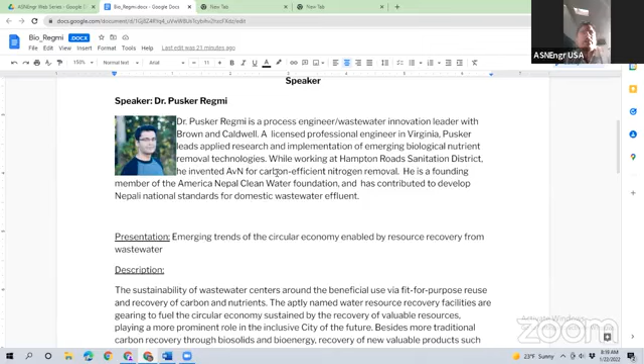So today's title of the presentation is Emerging Trends of the Circular Economy enabled by Resource Recovery from Wastewater. With that, I welcome Dr. Pusker and hand over to him my screen. Dr. Pusker, please start your presentation. Thank you.

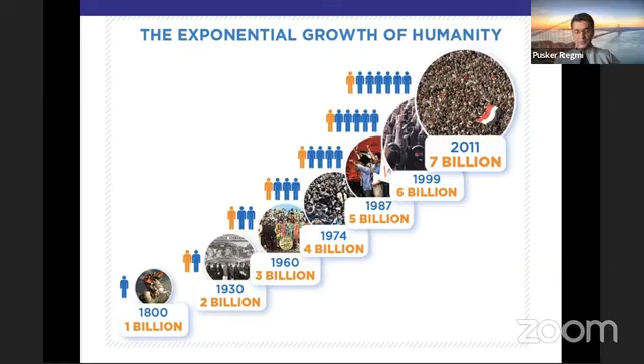Because when you put so many people in one location, and the classic example is Kathmandu. Kathmandu's population has grown by an order of magnitude in the last 20, 30 years. And if you put that many people in a small location, you generate a lot of wastewater. And if you do not treat it and do not do any beneficial things with it, it becomes an environmental disaster. So population growth, especially in urban areas, is a huge issue when it comes to wastewater.

So the current model of how we look at resources, not just wastewater, but in general any resources, is we get engaged in this extraction kind of a mentality. So we extract resources, we produce stuff with it, we distribute, we consume, and eventually we waste. And it ends up in our water bodies, it ends up in our landfills, and we get nothing out of it. This is a waste model, and this is a very linear type of a model, and it is highly unsustainable.

And now there is a growing kind of, and you can see this in other emerging fields as well, like battery technologies, electric cars have become a new wave of sustainable practices now. And there is this idea of, can we recover what we use so that we don't have to engage in exploitive extraction activities like lithium mining and so forth, right?

So in a circular economy, or a circular-centric way of looking at things, what you do is you extract resources, limited resources, you produce, you distribute, you consume, and then you reuse as much as possible, you repair and recycle. And when you do this, you close the loop. There is no waste or a minimum amount of waste. And that is the target even in the wastewater sector.

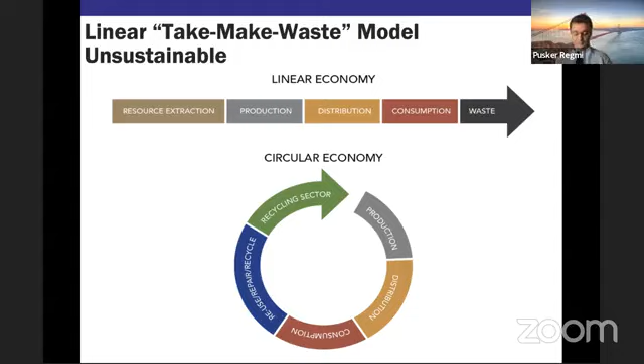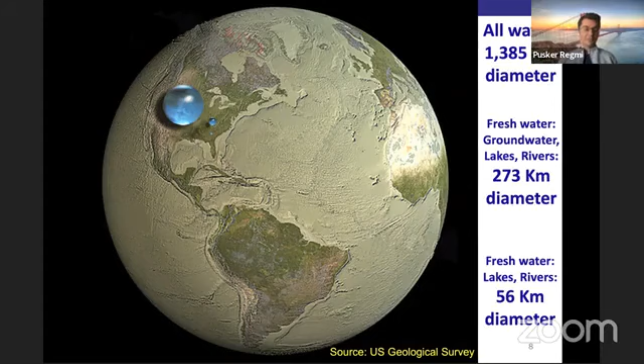So only 3% of the total waters is fresh water, and within that 3% fresh water, 2/3 of that is frozen in glaciers. So we are talking about just 1/3 of fresh water that is available for human consumption. And this is what drives the 7 billion people of the world, right? So we must get engaged in using these resources as efficiently as possible.

So the sustainability aspect of water is a huge deal, water and wastewater. This is even recognized by the United Nations. If you look at Sustainable Development Goal 6, it calls for clean water and sanitation for all. So there is a big recognition that if we do not take care of our water, and if we do not take care of sanitation, the world cannot move forward.

We cannot develop. So, in thinking of that, the only way to provide clean water and sanitation is through sustainable practices. And this will involve reuse, this will involve engaging in infrastructure that is low cost and available for everybody, especially in developing countries.

So that brings me to the main core of the talk today, which is wastewater is a resource. And we say it's a resource, but what are the resources in it? The first one is obviously water itself. Wastewater has water, right? It's mostly water. And that water is that same small percentage of water that is available in the world. And the fresh water is limited.

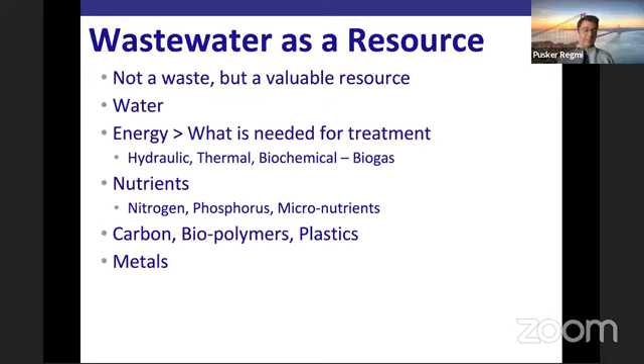And the third thing is the carbon. The carbon that can be used for energy can also be used to produce things like biopolymers, bioplastics, which are much more sustainable and can result in new waves of products which are environmentally friendly. And the last thing, in trace amounts, there are also metals, and these metals can also be recycled and have some beneficial use. In some cases, there is even gold that you can recover from wastewater, and gold, we know, is a timeless kind of metal. It can have several uses besides economic uses.

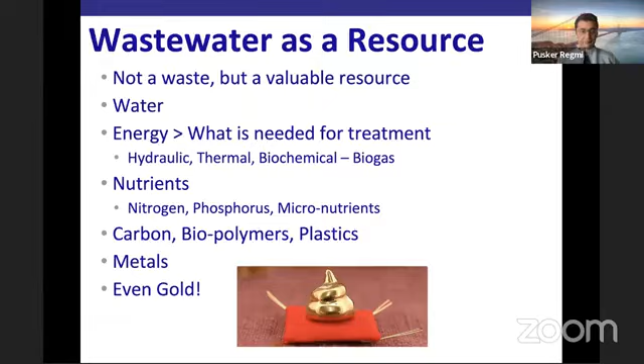So let's talk about water. What do we mean by water recovery from wastewater? This concept of fit for purpose is highly applicable when we look at water. Water has a different quality depending on where it is in the life cycle. So this is a representation of how the water quality changes throughout the water cycle, the way that we use it. We take raw water, and the raw water is, I would say, medium quality. For drinking purposes, we have to upgrade its quality. We engage in water treatment, where we improve the quality of water and make it safe for human consumption.

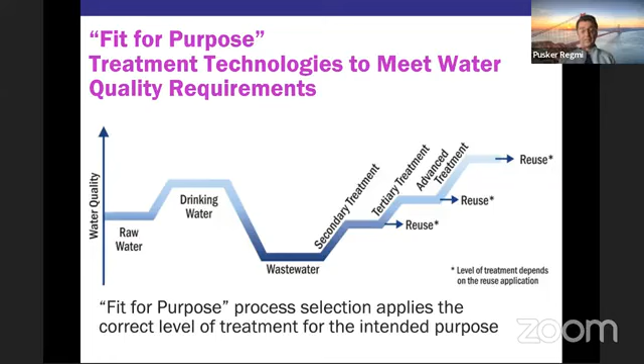So if you want to increase the water quality again, you need to engage in treatment, and there are several treatments, and this is the area that I work in mostly. We engage in secondary treatment, tertiary treatment, advanced treatment, depending on what type of use we want to have with this wastewater effluent, right? But even with secondary treatment and some level of tertiary treatment, the water can be used for different purposes. Not drinking water, but you can use it for irrigation. You can have different uses. So this idea of treatment based on what purpose it's going to serve is a very important concept in the water sector. It drives how much investment you have to make to improve the water quality and so forth.

So when talking about this idea of reusing water, what you can see here is we've been doing this all the time; whether we want it or not, this happens all the time. If you think about rivers of the world, they pass through a lot of cities; where there is a river, there is a city mostly, right? If you think about the Ganga in India, or the Danube in Europe, or here the Mississippi, there are several cities built around waterways and rivers, right? So what happens is you take water from the river, upgrade its quality and make it drinking water, and the city and its population are going to use it.

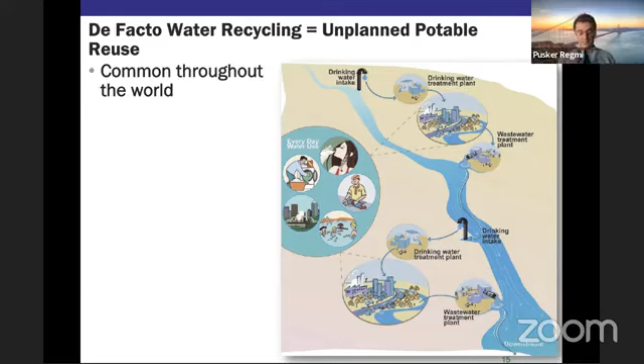And then you generate wastewater. In developed countries, you treat it, and then you send it back to the river. And the same river flows to the downstream city, and the downstream city uses the water from the river again. The cycle continues. So this is a kind of an informal way of reusing water, and this happens all the time. So what we are trying to do in the industry right now is do some of this more intentionally and with more control.

So that brings me to the idea of direct potable reuse. The one that I showed you is more like indirect potable reuse, but you can do this directly as well. The way that is done is the urban environment uses water, wastewater is produced, and then the wastewater is treated in these conventional treatment plants. But after the conventional treatment plants, to increase its water quality, you do advanced water treatment. Here, advanced technologies like reverse osmosis and UV disinfection are used so that it's 100% safe for human consumption.

And if you want to do direct reuse, then you don't put it back to environmental buffers. You directly send it to a water treatment plant to get into the drinking water supply, or you directly send a water line to the urban water distribution system. So by doing this, you are closing the loop on water. You used it, you treated it, you increased the quality, and then you again consumed it. So this is a circular kind of consumption. There is no waste in this model.

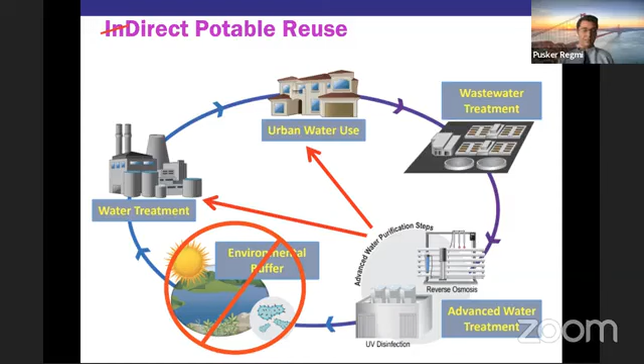And this is, unfortunately or fortunately, going to be the future for a lot of water-stressed cities in the world. Think about the western part of the United States, California, and so forth, where increasingly fresh water is getting stressed. And the question that you may all have is, is this potable reuse safe? Can this be done safely? Is there any danger for human life? And does it cause long-term side effects and so forth?

Fortunately, on that, we have good news. This practice of direct potable reuse has been done for more than 50 years now. We have a classic example from Windhoek, Namibia. They have been doing potable reuse since 1968. It's not a village. We're talking about a small city, and the results are clear. There is no adverse human health impact because of direct potable reuse. And this is good news. This is what's going to be instrumental in solving some of the water crisis that is impending due to climate change and other stress factors.

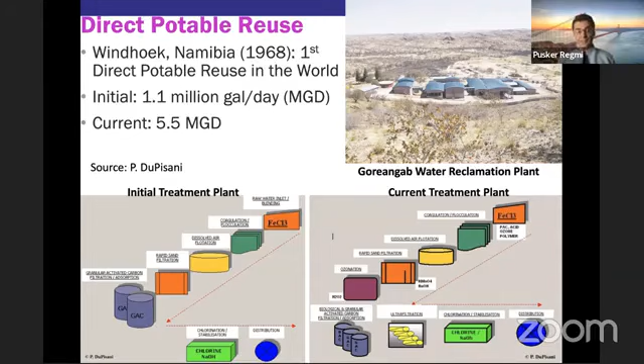And when we talk about water reuse, sometimes we are not exposed to these ideas, right? But you may be surprised that water reuse or recycling could be happening near you. I live in Maryland, close to Washington, D.C., and in the Northern Virginia area, we've been doing this since 1978. This is not direct potable reuse, but this is the environmental buffer concept, where the wastewater treatment plant is discharging its effluent into Occoquan Reservoir, which is a man-made lake reservoir for water treatment and distribution. And the water treatment plant is taking its source water from the same reservoir. So this has been going on for a long time.

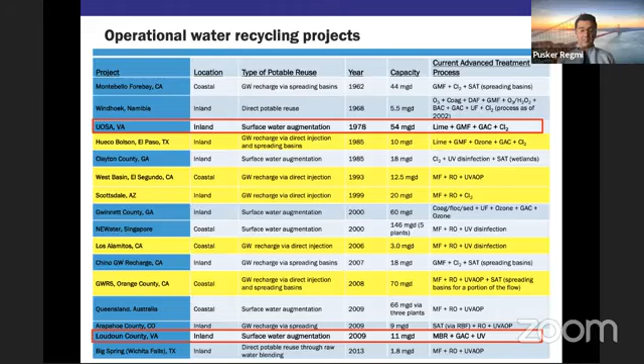And there are also other examples of it. Loudoun County is another one where surface water augmentation, the same concept, is used. And then there are places like Big Spring in Texas, where direct potable reuse, exactly the same concept as the Windhoek, Namibia example, has been happening since 2013. So this is closer to home now. This is not an alien concept. This is not something to be scared of. This is everywhere. It's safe. It's proven, and it's just a matter of people accepting it. And it will increasingly become more of a solution as we move forward.

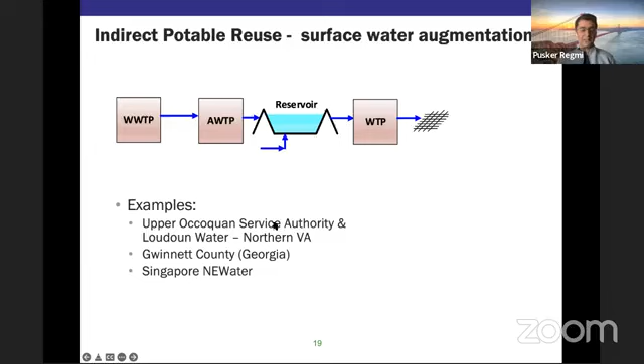So here's the example of indirect potable reuse. You have a wastewater treatment plant. The effluent gets treated in advanced water treatment plant type of infrastructure, improving the water quality. At this stage, it's almost ready for potable reuse. The quality is the same as what you would produce for potable reuse, but if you don't have to go to potable reuse, the idea would be to send it to the reservoir, and then with the environmental buffer, you go to water treatment, right? This is what is being practiced in some locations. The Northern Virginia example, Gwinnett County, which is one of the most prominent counties in the Atlanta area, also practices this. And Singapore, being an island nation with limited water resources, also engages in this type of activity.

And eventually, when the population centers are ready to use that, they can take it out from the groundwater reserves or aquifers, right? And this is a huge initiative in the Los Angeles area, Orange County area. They've been already doing this with a lot of success, and this is what they are counting on to combat some of the water stresses of the future.

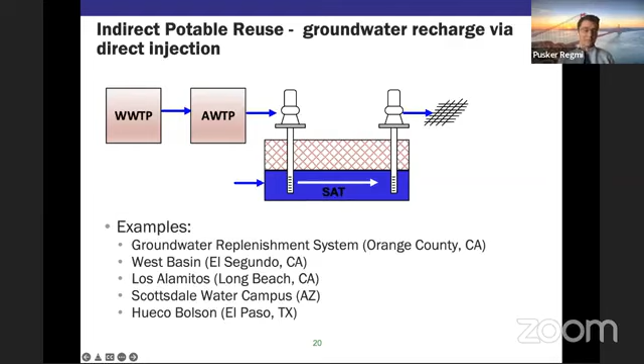So the other aspect that I want to talk about a little bit is the Eastern Virginia example, and this is the Hampton Roads area, and there is a utility called Hampton Roads Sanitation District. I spent 3 to 4 years in this utility, working as a PhD student doing research. So I'm pretty familiar with the area because I lived there, and I saw firsthand some of the consequences of climate change and what happens when we have water levels in the groundwater that go down, and so forth.

So the model of treatment, again, already talked about how it gets treated. Here, a lot of drinking water and useful water comes from groundwater. So we tap into the aquifer, the water reserves below the ground. We use it, and the utility, in this case Hampton Roads Sanitation District, has 13, 14 wastewater treatment plants throughout the area. They treat the wastewater, and in most cases, they discharge it to the ocean.

And this is not the most beneficial use of treating the water, because what you are doing is you're sending decent quality water into the ocean, as opposed to sending it back to the aquifer. You're not closing the loop. You are making it go to the ocean. And the other downside of doing that is not only you are sending medium quality water to the ocean, but also you're sending some of the nutrients to the ocean.

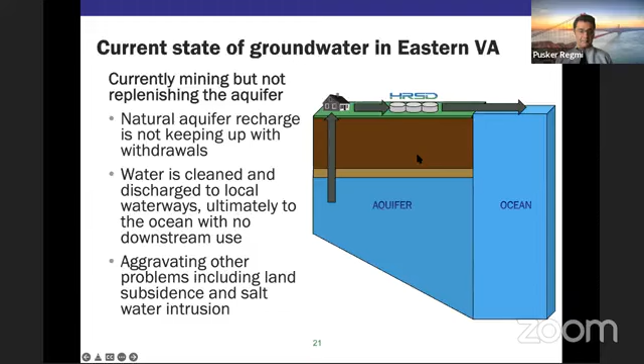And so if you look at the issues that I was just mentioning, the drawing of the groundwater: in this part of Virginia, they have 177 permitted groundwater wells, and 200,000 unpermitted wells that are used for domestic use. And this is a huge amount of water that people are drawing for beneficial use every day. And if we look at the groundwater levels, they are dropping in this part of Virginia, the Hampton Roads area. In the last 100 years or so, it has gone down by 50 meters. This is a huge number, right?

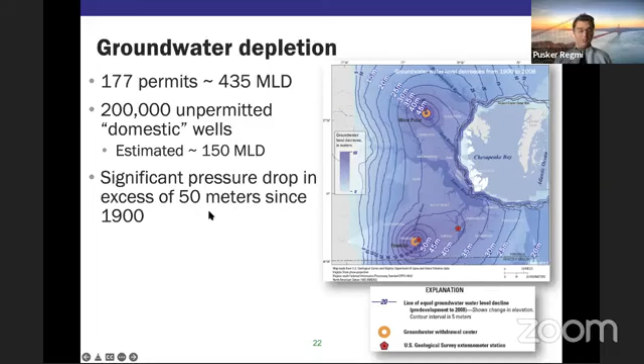And the consequence of lowering the groundwater is severe. So if you think about the Hampton Roads area, it's the number one at risk besides New Orleans in terms of sea level rise. About 50% of the sea level rise, it seems, is caused by land subsidence. And land subsidence is nothing but groundwater levels going down, and there is this compaction of land happening, which causes your land to go down. So when the land around you goes down and the sea is rising because of melting ice and whatnot, what's going to happen? You'll have a compounding effect of sea level rise.

And I lived in Norfolk for many years, and I saw this firsthand. Even if there was a 2-hour rain, the city used to get flooded. All the storm water used to start overflowing, and it was already really bad. And this will continue to get worse if we don't do anything about it.

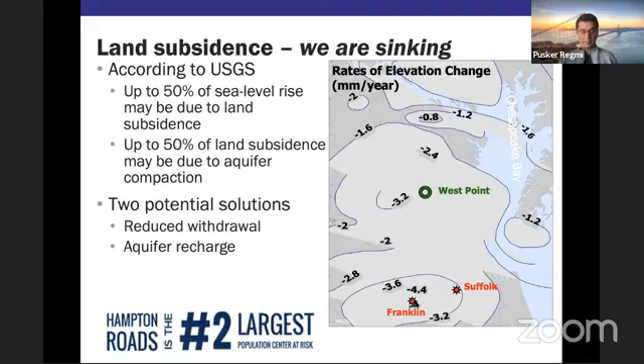And so with that kind of a backdrop, what Hampton Roads Sanitation District decided is to close this loop. So as opposed to sending the effluent from the wastewater treatment to the ocean, now what they are going to do, and this is already the work that is happening, they are in the process of building these advanced water treatment plants.

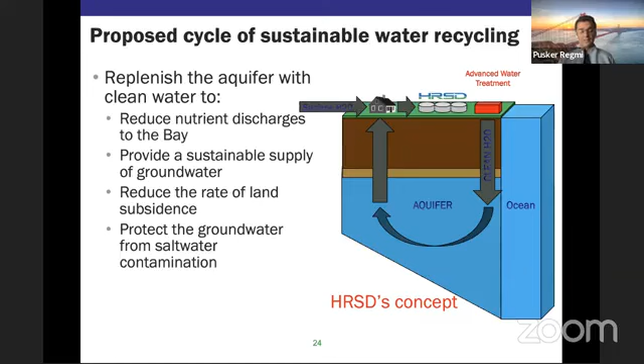And the idea is to clean the effluent of wastewater, make it better, send it to the aquifer, increase the groundwater levels, and close the cycle. So this is the concept that is already happening around us. And this seems like the way forward for all the places where this type of issues are happening. So this model is highly recognized as being very sustainable, and a lot of people are behind this concept.

And just to give you a landscape of the advanced water treatment that I was talking about. So you take the wastewater and then you engage in improving the water quality of it. And there are already proven, highly proven technologies to do this. There is no question in that. The water quality coming out of this is of highest quality. There are no pathogens. There is nothing in it that jeopardizes human health.

Reverse osmosis is one of them, nanofiltration, and even the combination of granular activated carbon and granular biologically active carbon. Both of them, when they are combined, can produce high quality water that is safe for human consumption. So we know how to do this.

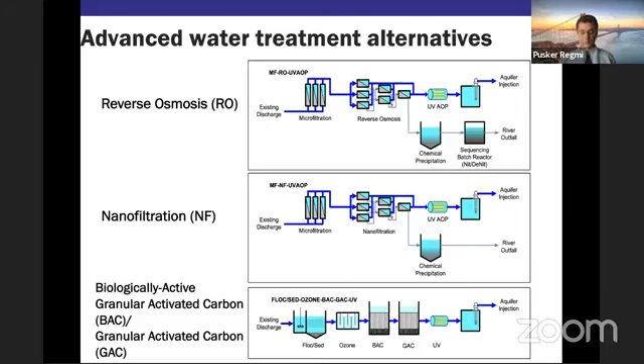So we talked about water and why water is important in many different ways, right? For human consumption, through to flooding in the low-lying cities, all of that. So water is important, but nutrient is also very important. So the nutrient story, I think, starts from our ability to create synthetic nitrogen. This probably is one of the biggest, one of the most underrated inventions of the last century in my mind. Because without this, I don't think we could have been 8 billion people right now. We'd be limited by nitrogen.

So nitrogen that is fixed in the natural environment is a small portion of what we use to fertilize our crops and get food out of it, right? So this chemical, physical type of process can take nitrogen from the atmosphere. And we all know that most of the atmosphere is nitrogen, almost 79% of it. And we can convert that into ammonia. Ammonia is what gives plant life the fuel to grow, right? So this was done, I think, in the 1920s, and this rapidly changed the human course, and it's one of the biggest inventions I can think of.

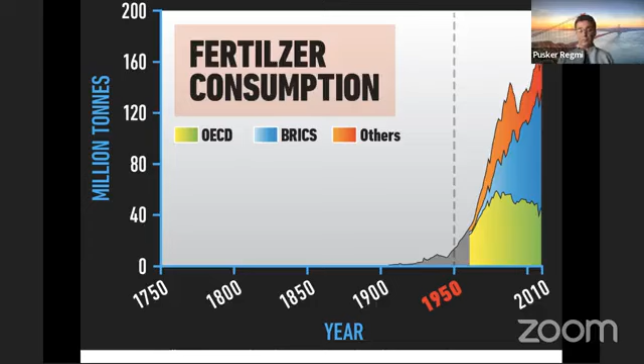But the issue is, this process was so efficient and so economical in general, we stopped hearing about fertilizers that much. It was cheap; even if you have some memories back from Nepal, urea and so forth, it's relatively affordable. So the use of it exponentially grew. With it, food production also grew, but we were indiscriminate in its use. We overused it in some cases. So the fertilizer consumption went up. Societies started to grow. The food shortages or limitations on food growth in at least slightly more developed countries almost altogether vanished, and as a society we were progressing.

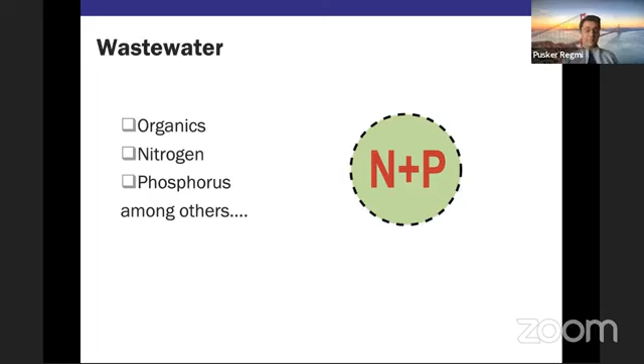And so that brings me to another nutrient along with nitrogen, which is phosphorus. And wastewater has plenty of nitrogen and phosphorus. Both of them are important. And I think phosphorus can be even more important. So the idea of improving water quality and doing wastewater treatment in developed countries is nothing new. We've been doing this for more than 100 years. And there are a lot of sophisticated processes based on biology and natural systems that can be used to treat wastewater, right? And this has been refined over time, and these are well established, I would say.

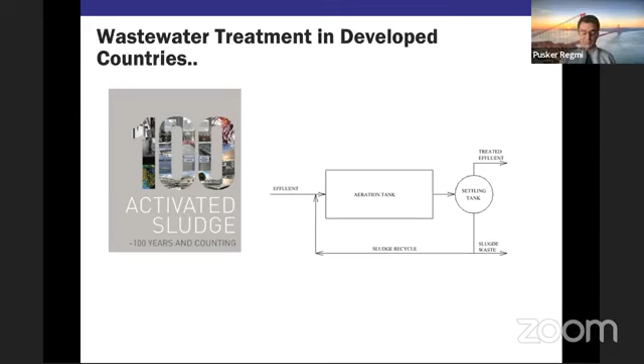And the field that I work on, I'll just introduce a little bit of what I do also, is advanced nutrient removal. I mentioned that we use biology and natural systems to treat our wastewaters, especially removing nitrogen, because we know if not treated, nitrogen can end up in your water bodies and cause all sorts of nuisance, right? So nutrient removal is extremely important from wastewater.

And for the longest time, we've been using processes and concepts that are more energy and resource intensive. And my day-to-day job is to make this more sustainable. How can we remove and recover nutrients from wastewater so that we can do something beneficial with it? At the same time, how can we limit nutrients to a very low level in the wastewater effluents?

And this is highly relevant in the area that I live, which is the Washington, DC metro area. Here, all the treatment plants, DC Water and WSSC on the Maryland side, engage in something called enhanced nutrient removal. So their mandate is to take out as much nutrient as possible. And this is done to save Chesapeake Bay, basically. Chesapeake Bay is a national treasure. Obama claimed that, I think. It provides a lot of economic benefits for this area, and we must do this.

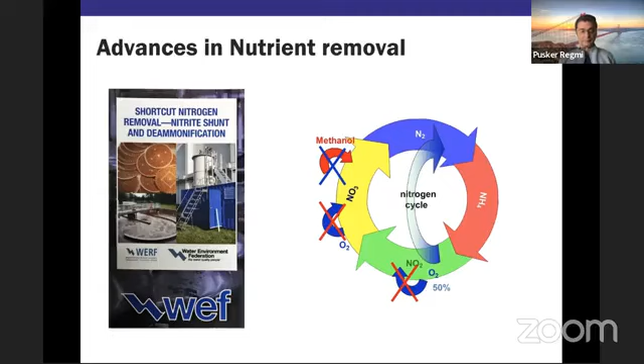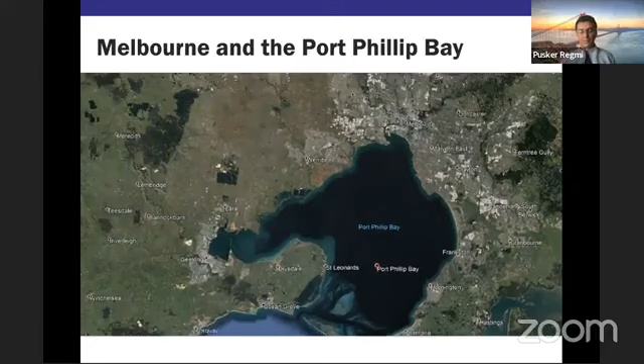So that brings me to one of the projects that I fondly worked on in Melbourne, Australia. Melbourne is a bustling, growing city of around 4 million people in the metro area, I think. And it has this bay called Port Phillip Bay. So Chesapeake Bay is quite important for the Washington, DC area, and Port Phillip Bay is similarly very important to Victoria and Melbourne City itself.

And with this growing population in Melbourne, they were facing similar issues. The bay was getting enriched with nutrients. The quality of water was going down. The fish life started to suffer, and the trend continues. It seems like it will be a big environmental issue in the future.

So this picture on the screen shows you some of the natural, almost hybrid natural and human-made systems that they use to treat wastewater. And to be honest, they do a pretty good job. They use these so-called anaerobic lagoons for treating the wastewater. And when they use this anaerobic process, they end up producing biogas. The biogas, we all know, can be converted to electricity, and that electricity powers some of the more advanced wastewater systems they have in the process.

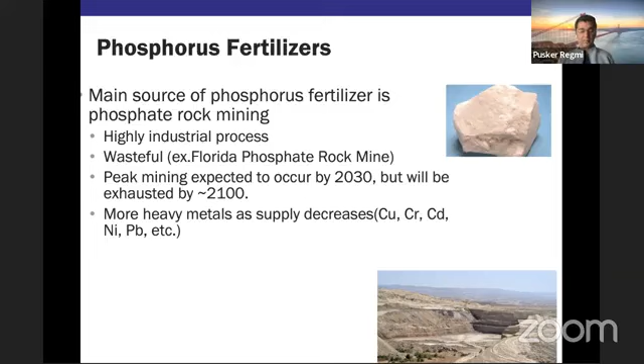And some of the wastewater recovery concepts can help with this, right? So this is a very exciting field that is emerging in our industry right now. And I feel like this will change a lot of things. So peak phosphorus is a concept similar to peak oil, right? There is no man-made alternative to phosphorus. So everything that we use needs to come from nature, and it's limited. So we have to start looking at concepts of recycling and not wasting any of it, right?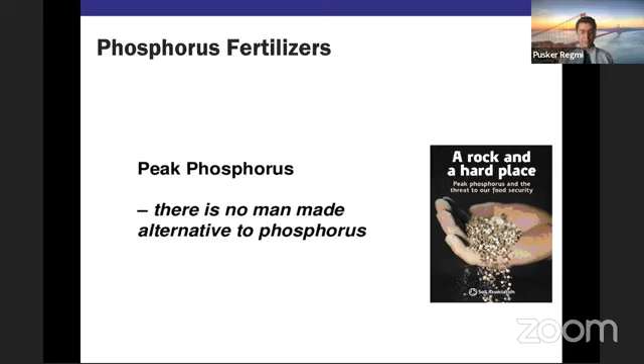So look at what happens to food security if the supply chain of phosphorus gets stressed. If you think about the mining activity and so forth, over time it's going to get more expensive, because the process that is needed to get phosphorus from mines is going to be more energy intensive. It's going to be more intensive, and so the cost is going to go up, right?

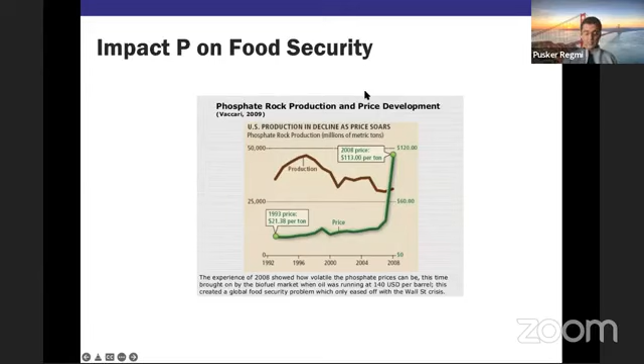Whereas the production, based on the location of phosphorus and the quality, is going to go down, right? So this is supply and demand, and the increasing price of phosphorus will have a huge impact on the overall food production of the world, right? So we need to take care of this. And the other sad situation, if we look at phosphorus, is where it's located.

Where are these mines? If you look at the biggest concentration of phosphorus, it's in Western Sahara, the Sahara Desert, and Morocco. 75% of it is in that region. And in the United States, it's only 2%. There's some in China, Russia, but in general, these are not the most stable parts of the world, right? So to rely on phosphorus mines in Morocco or Western Sahara is not ideal

for any of these nations, right? There could be political issues, geopolitics. Any number of these issues can disrupt the whole food production throughout the world. So because of this as well, we must engage in sustainable practices.

So again, the idea is to produce wastewater. The wastewater gets treated, nutrients get recycled. It's used for agriculture. Food is produced, humans consume it, and we close the loop. And this is the dream, right? And it's not only a dream, I would say. We know how to do this.

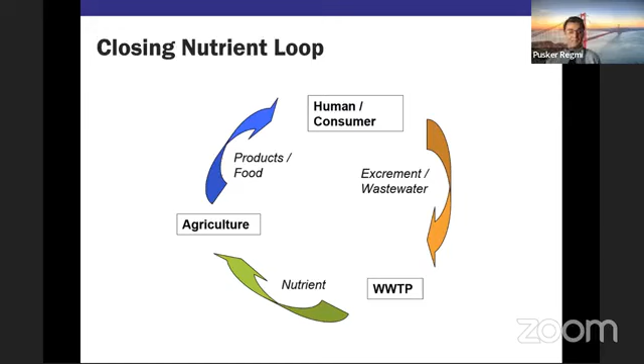There are a lot of steps to be taken and a lot of education when it comes to people understanding these concepts, politicians also getting behind these ideas, and as a society, just demanding that, hey, we need to do more and we need to be more sustainable. We know how to do these. These are highly beneficial ways of creating cities and developing our society in general, right? So we must engage in these activities, and we know how to do it.

So with this phosphorus recovery concept, as I mentioned, we already know how to do it, and it's actually getting better. The industrial processes, like the one I'm showing here, is just one of the many examples of this type of technology. It can recover struvite, which is a phosphate mineral, but at the same time, it captures some of the ammonia.

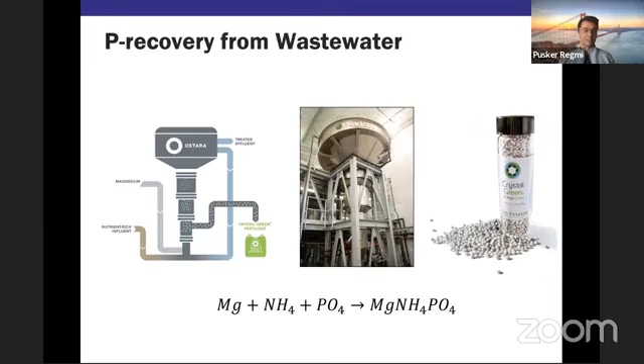So these crystals, really good looking fertilizers, nice pellets, can be used as a slow release fertilizer in your lawn. It can be used in agriculture. And this is a highly sustainable practice that we can do already. So phosphorus recovery ideas are gaining traction, and it seems like nothing is going to stop it, right? And I'm glad to see a lot of utilities and cities getting interested in these in general. This same technology was demonstrated in the world's largest wastewater treatment plant in Chicago.

And again, highly established kind of a concept. We know how to do this, but getting the recognition or demonstration in the world's largest wastewater treatment plant just gives us even more credibility. So yeah, all these things are pointing towards a highly sustainable future for us, and I'm quite excited about it.

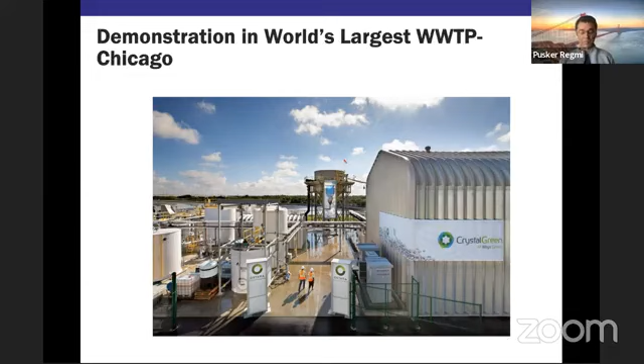So then we move to the carbon side of things. I talked about water, I talked about nutrients, and now let's talk about carbon, right? And carbon, again, you can think of carbon as energy to a certain extent. Carbon can be converted to energy, right? But carbon can also be converted to a lot of other things. This slide shows you how carbon can be captured from wastewater.

Even the process of simply doing wastewater treatment is going to produce biosolids. Biosolids can be digested to produce methane, and methane can be used to produce electricity. You can produce volatile fatty acids if you do some sort of anaerobic treatment. You can completely burn or incinerate that sludge, biosolids, to produce heat. So there are so many ways to use the carbon that is captured in the wastewater.

But unfortunately, for the longest time, the best use that we could do was landfill the biosolids from wastewater treatment. So you create biosolids, you do not do anything beneficial with it, and then you landfill it. And the problem with landfilling of biosolids is it does not have any beneficial use, but it is an environmental disaster, because slowly that biosolids is going to release methane, and methane is a greenhouse gas, right? So we are not getting anything beneficial out of it, but we are polluting our environment with it. So that was the sad state of affairs for the longest time.

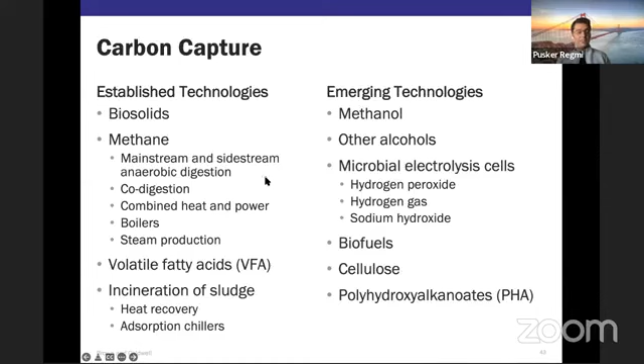But now there is a growing recognition that, hey, we cannot do that. These biosolids, or these types of precursors to materials, are highly beneficial. We should be doing something more meaningful and useful with them, right? So the ideas of biofuels, microbial electrolysis cells, cellulose, PHA, which can be precursors to bioplastics, all of these things are gaining traction because of that. We can't simply landfill waste from wastewater treatment. We should be doing something better with it, right?

So one of the easiest, or well understood, things people did for a long time is biosolids treatment with anaerobic digestion. And you can think of this process exactly the same way as the gobar gas ideas that we have used in Nepal for many, many years, right? Same idea, the bio... anaerobically digested, a simple process of microbial degradation. Biogas is produced, which is mostly methane.

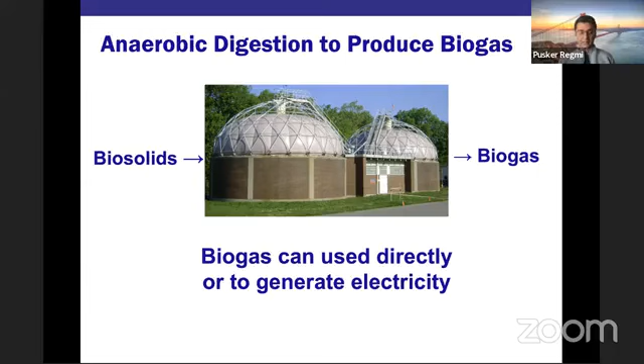And that methane, if you put generators and turbines, you can produce electricity. And this green electricity or green energy can be used to do the treatment. And in some cases, it can also be sent to the grid if you have surplus, right? So the idea is nothing technically difficult. It can be done, and it has been done. DC Water engages in this in our area, and they produce a significant amount of electricity just by biosolids treatment in anaerobic digestion. But it gets even better.

So in a lot of cases, these digesters are designed with extra capacity for future growth. So in that case, what they can do is take some of the food waste that is created by restaurants or other commercial activities, and use that food waste in these digesters to produce more gas, right? Not only are you treating the solids from wastewater, now you are creating biogas with food waste around the area. And this is fantastic, right?

Again, food waste, if you do not recover biogas, is simply waste. It ends up in the landfill. And as I mentioned earlier, food waste can also produce methane slowly, right? Which is a greenhouse gas. So you can completely turn that around, make beneficial use and get more biogas doing this type of approach. And this is something called co-digestion, and this has been used in several cities, even in the San Francisco Bay Area.

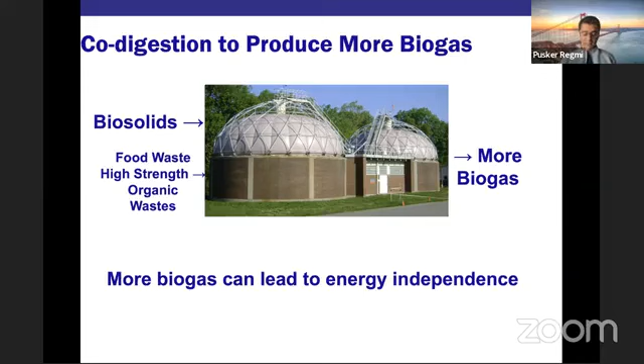This approach has been used to create more electricity than the wastewater treatment can use, and it is sent to the grid, right? So these are all proven concepts, and we're only getting started in this field, but it seems like a lot of cities and a lot of places are highly interested in this type of approach. So again, a simple thing: engage in co-digestion using the food waste and so forth, and you can produce more energy. And that energy can be useful to your city, and it can augment some of the energy shortages also.

So this is highly relevant for developing, and I think this is an extremely viable option for cities like Kathmandu, Pokhara, and so forth. So when we start developing wastewater treatment plants in Nepal, I think doing things like this is a no-brainer, and we should definitely engage in it.

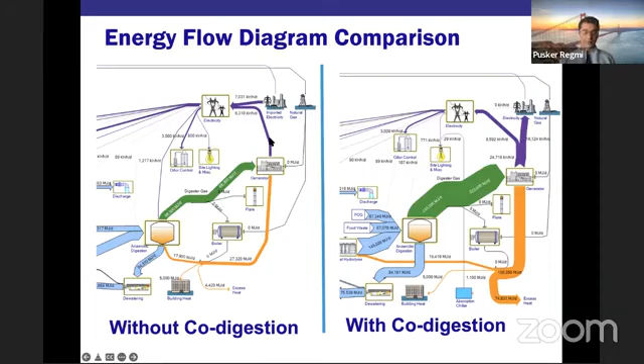And the good news is, one of the wastewater treatment plants in Kathmandu, Guheshwori wastewater treatment plant, does have anaerobic digestion, and they are engaged in producing biogas. So people know it, and there is some traction around this.

So a slightly more advanced concept with biogas is you can use microbial processes, microbiology that is present everywhere, nothing genetically modified or anything like that. And you can use the normal microbial processes to create something called biopolymers. And these biopolymers are amazing. With methane, you can produce electricity, but with methane, you can also do this microbial process to produce biopolymers.

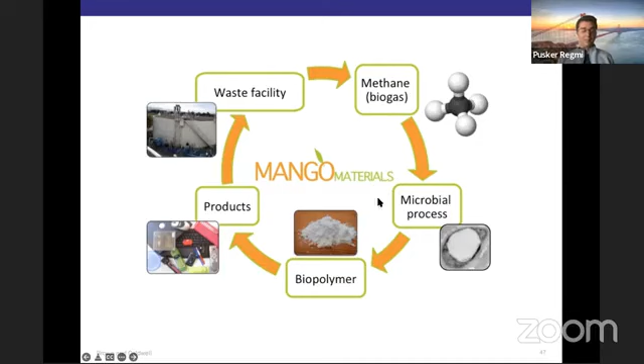And these biopolymers can be used as a substitute for plastic, right? Like the unsustainable plastic products, which come from oil refining and highly unsustainable practices. So if we can replace some of these products and their precursors with biopolymers, that's going to offset some of the environmental impacts as well. We have this opportunity in wastewater treatment. Industry is laser focused on finding more beneficial use of the carbon elements that are present in wastewater.

And so this whole idea of resource recovery is fully in place, and we know these concepts. And I'm as excited as ever to work in this field and contribute. But in general, I think we should be really thankful to the innovations and the ideas that have transformed this, right? So it's a very exciting time when it comes to closing the loop and doing circular economy in water. And the future is looking bright, and I'm excited to be part of that.